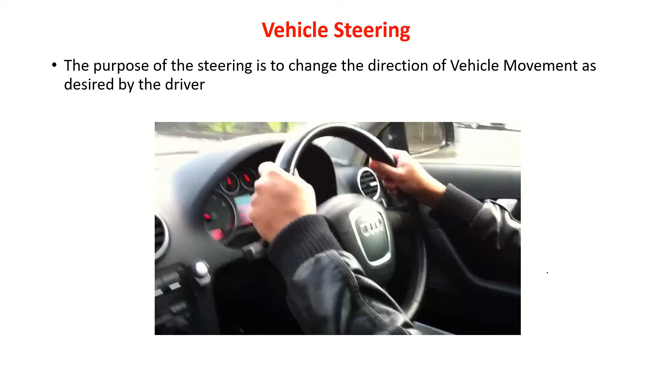First, let us understand the steering principle. We have the Ackermann or center point steering principle. What exactly is an Ackermann steering system?

Consider the vehicle here. Now I am steering this vehicle to take a turn. You can see this is the inner wheel and this is the outer wheel. Let me draw a perpendicular at the midpoint of this tire, when you see from the side. Similarly, for this wheel also, I draw a perpendicular at the midpoint. The rear wheels also I draw. All these lines will meet at one point.

About this point, you see here, this is a circle. This wheel traces this circle. Again, this wheel traces this circle. This wheel traces this circle. So you get a number of concentric circles.

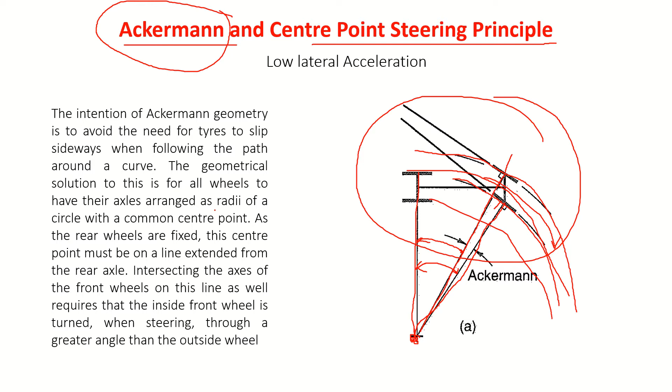The intention of Ackermann geometry, or the Ackermann steering principle, is to avoid the need for tires to slip sideways when following the path around a curve. The geometrical solution to this is for all wheels to have their axles arranged as radii of a circle with a common center point.

As the rear wheels are fixed, this center point must be on a line extended from the rear axle, intersecting the axis of the front wheels on this line as well. This requires that the inside front wheel is turned through a greater angle than the outside wheel when steering. That means delta I must be larger than delta naught. Okay, this is Ackermann steering.

How do we achieve this Ackermann steering principle? Let us look at the geometry that we should be designing.

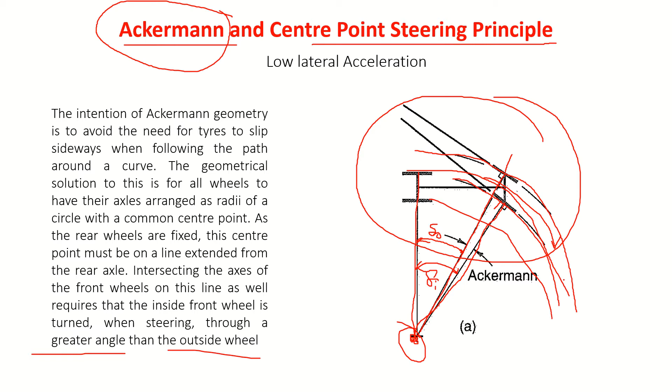Now you look at this, and just consider this is a steering rack, and these are what you call tie rods. So this is the steering arm, this is the tie rod, this is the tie rod, this is the steering arm. Of course, this is the steering knuckle here.

You have the steering knuckle. Now if I join these two points by a line, by an imaginary line, you see here this is a trapezium I'll get. So it's a trapezoidal geometry.

And the steering arm, if I just produce it, and for this steering arm also if I just produce it, the lines produced will meet at the center of the rear axle. If we design the geometry in this way, then delta I will be greater than delta naught when taking a turn, and it meets Ackermann's requirement.

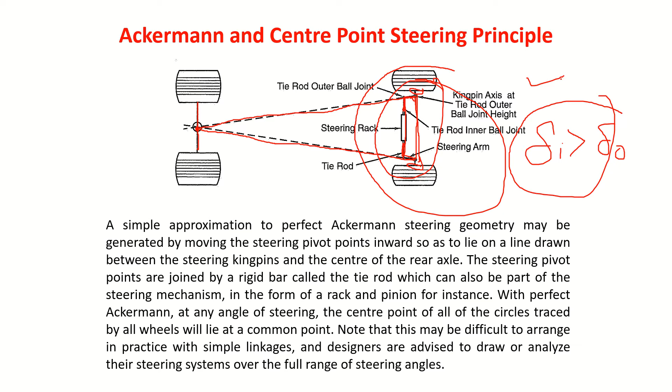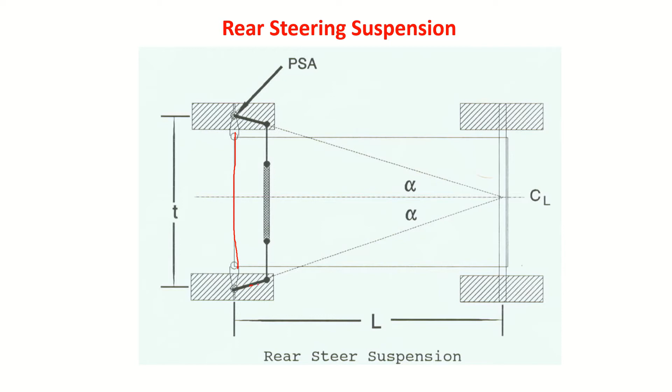When we design the real steering mechanism, we may accommodate this behind the front axle, or it may be ahead of it. That is what we mean by rear or front steering suspension. In this case also, when we produce these lines, as I said, it will meet at the center point. So even if you have it at the front, it should meet the same requirement.

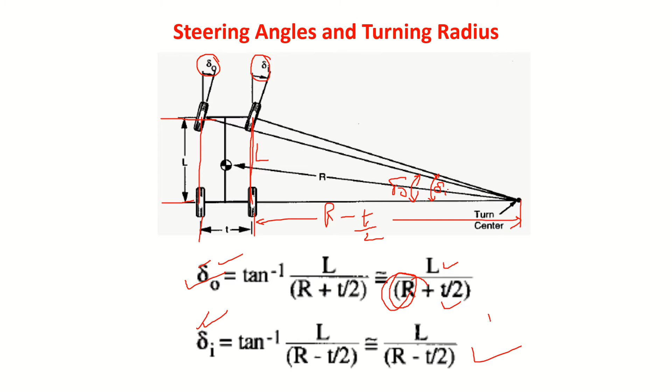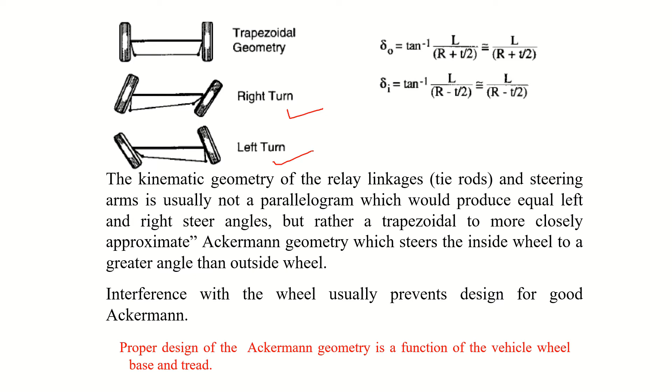Now steering types. You can manually steer the vehicle, or you can use power assist. In manual steering system, using muscular energy, we steer the wheels of the vehicle. Here we use a power assist, either it is a hydraulic power assist or electric power assist.

So that's what I have written. Again, power assist can be hydraulic power or electric power. So this was the first one to be designed, invented and adopted. So whenever more effort is required to steer a vehicle, then hydraulic assist is being used. Even now it is present in heavy vehicles.

But however, in lighter vehicles, instead of hydraulic power, they use electric power, that is motor, EPAS, we call it as EPS, electric power assisted steering system. And of course, we use ECU so that we can easily steer the system, and moreover, this is a very, very efficient system, compact and efficient.

Correct, since it is a battery driven system. So nowadays, in smaller vehicles, electric power assist is very, very popular, and still in heavy vehicles we use hydraulic power assist.

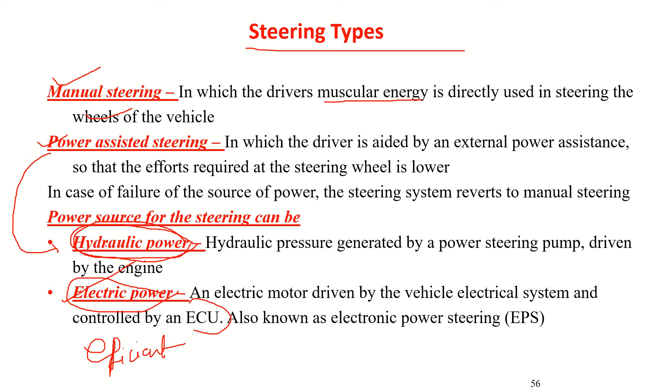Now here I have just explained the steering systems. One of the steering systems I'm talking about, which is the most popular one, is the rack and pinion steering system.

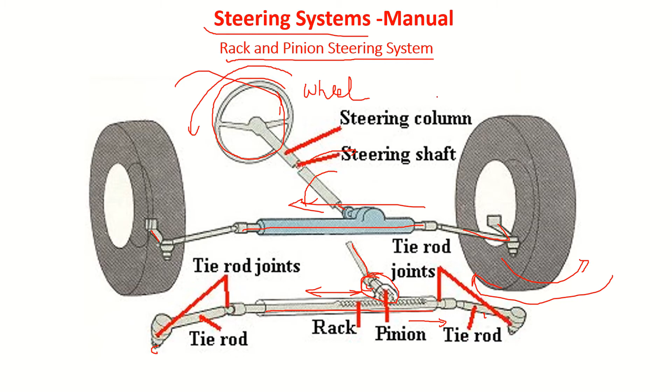In some of the vehicles, you can find the recirculating ball steering system. Sometimes it is known as the pitman arm steering system.

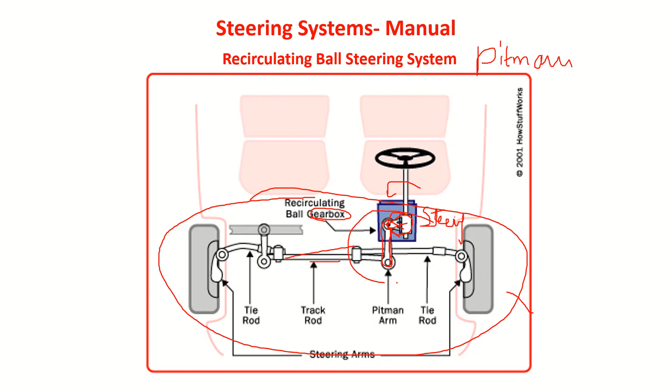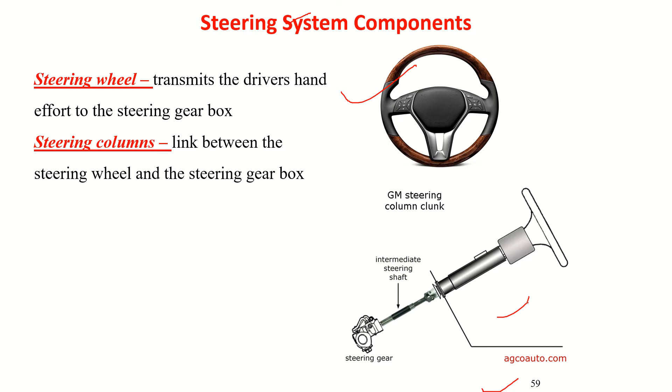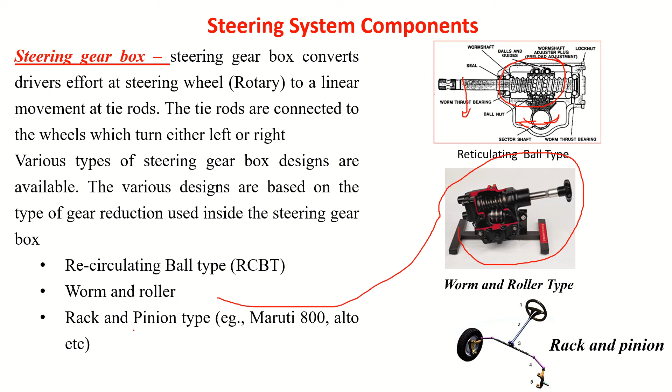Okay, so how exactly this works, right? I'll just explain this with a video. So as I mentioned earlier, the steering components are: there is a steering wheel, then there is steering column, then you have steering gearbox. This is what I call it as recirculating ball type. So rotate this, then this will move this way. Rotate this way, so that will be able to drive the pitman and other linkages. Sometimes they use worm and roller type kind of design too. And already I explained about the rack and pinion type gearbox.

And this is the tie rod design. And how exactly it works, if you play this video, you will understand the working of this. Or you can look at the car also. Anyway, I am not recording this video, it's available on YouTube. Type this keyword, get number of videos, and you can watch the video and understand the working of that.

There are power assisted steering systems, as I mentioned earlier. So the question is, the road condition is very bad, the road offers too much of resistance, then you require too much of effort for steering. It will put too much of stress on the driver. In such a situation, to enjoy driving, to make driving a real good experience, it is better to use the power assisted one.

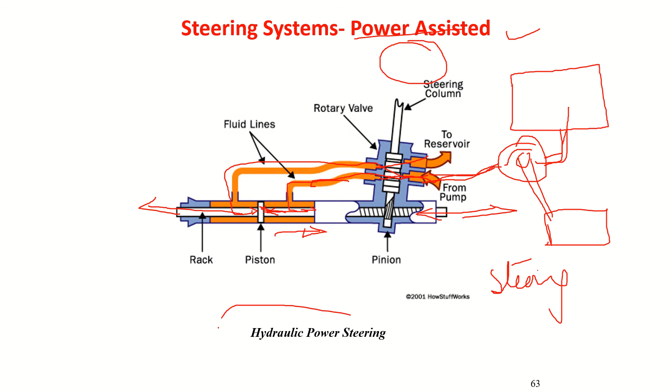As the engine speed increases, the pressure will also increase. So we should have special valves to reduce the steering fluid pressure as the engine speed increases. That is what we call speed sensitive power steering.

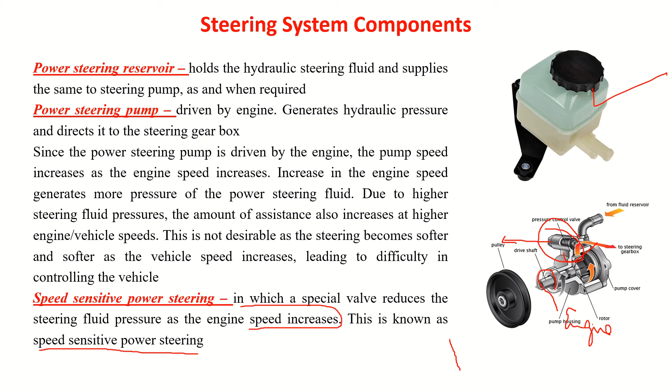Here, the pressure control valve: we have to set a predetermined value at that pressure. It should take the fluid, pressurize it, and then send it to the valve. That's exactly what we need to do, right?

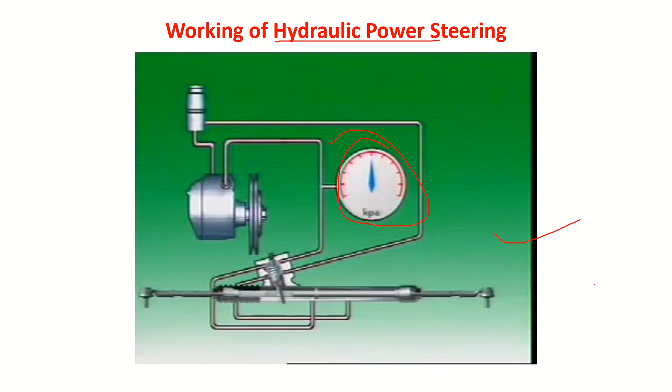Now, how exactly does a hydraulic power steering work? I think you understood the theory. When you play the video, you can understand much better, and you'll even know how the pressure values can be set. Another very important and nowadays very popular one is electric power assisted steering.

They call it the EPAS system. You can see here the steering wheel, and you have steering gears, and there we have a motor to drive this. That in turn drives the pinion, which then drives the rack. So we are using an electric motor, which is why it is called electric power assisted.

Now let us look at this. Your vehicle is running at a particular speed, so the vehicle speed sensor will give this value, and that value is fed to the ECU. Whether you want to steer in this direction or that direction, the intention and direction of steering angle, as well as the angle itself, will both be known. So you will come to know which direction it should go.

It will also know what torque you have applied, and what torque is needed. From that, it will find out what exactly the amount of torque the motor has to develop. Accordingly, the ECU will send the direction in which the motor should rotate, and the torque to be developed by the motor to overcome this resistance. It will manage the current value accordingly.

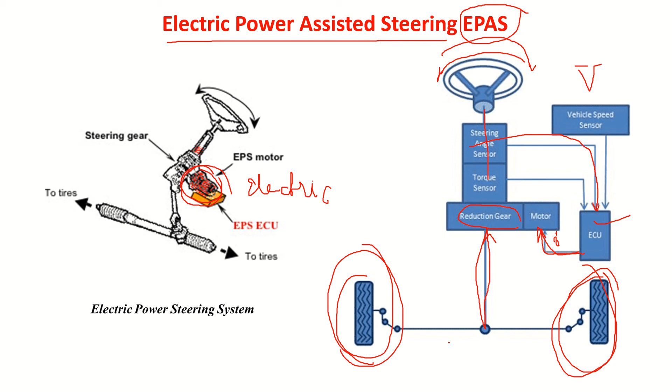Now, the design of all these things, like the loads and forces that act on the wheel on a particular road surface, the torque required to drive this, the torque amplification that happens, how the torque sensor senses the torque, and what torque the motor should develop—all these calculations we can do and design the system. These details are provided in another subject called vehicle dynamics, where we teach about this. Here, my intention is to make you familiar with the various types of steering systems.

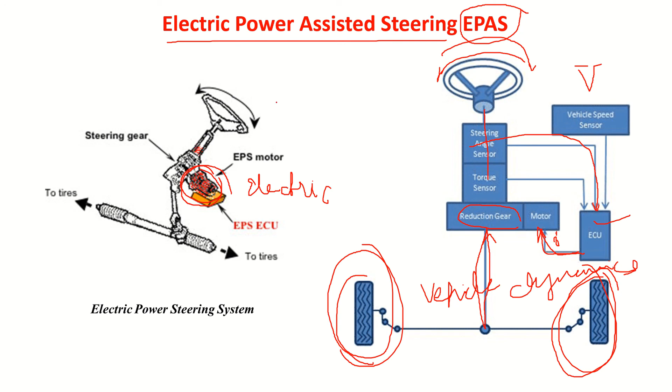So electric power steering's main advantage is that it is compact and efficient, and because of that, fuel consumption gets reduced. That means you can automatically reduce emission levels. That way it is very, very useful.

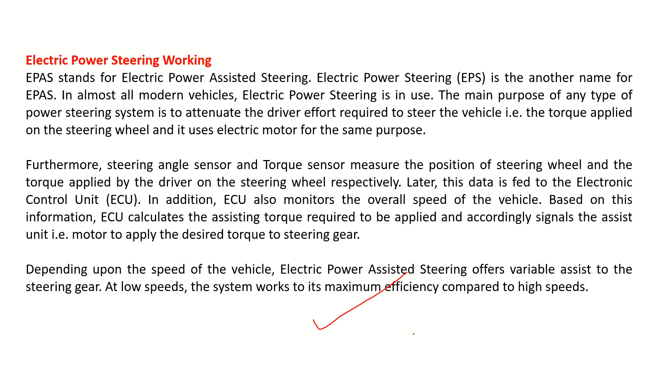So again, there are many types and designs in the EPAS system too. Column assist type, you see here: I am using the motor to rotate this column, then it goes to the pinion. Whatever torque it gets—driver's torque plus the torque developed by the motor—the total torque will be coming over here. So I can use column assist type.

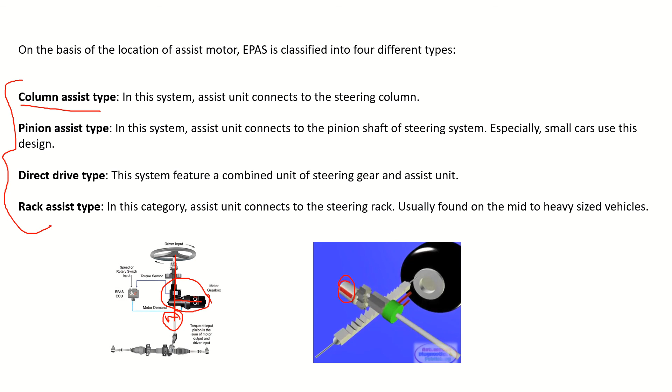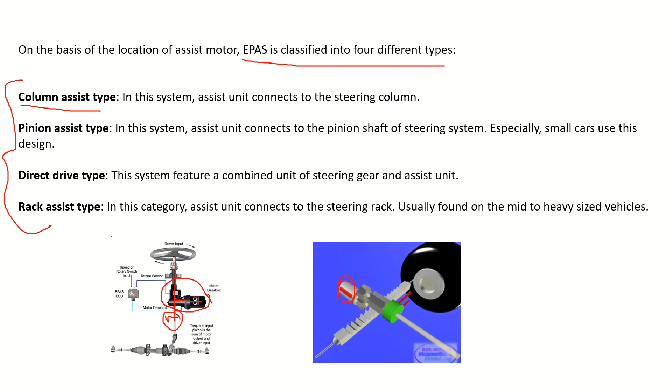Another way is we can mount the motor here itself, to assist the pinion to rotate instead of the column. Similarly, I can use a motor to drive the rack itself. So many different types of EPAS systems are available, depending on the space available and the compactness of the design; they place the motor at various positions.

If you play this video, you can find it on YouTube, and understand how exactly the EPAS system in a BMW car works. Another very interesting educational video on YouTube is from Learn Engineering. Just search how steering system works, this video will appear, and you can play it to understand exactly how a steering system works.

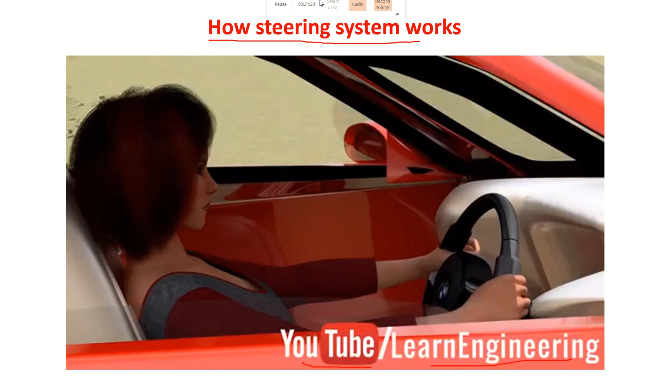So this gives us an idea about the steering system that we use in vehicles. At this point we'll stop this session, and in the next section we'll discuss the vehicle suspension system. Thank you for your patient hearing.